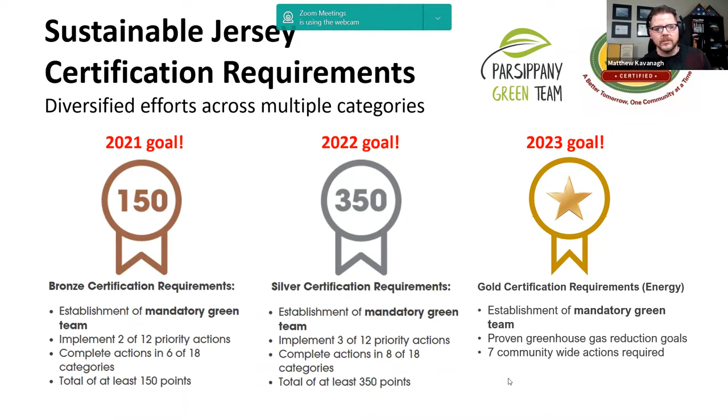So 2021, we're after 150 points or bronze certification. In 2022, we want to get silver, which is 350 points. And then we're also going for gold in 2023, which is the gold certification in energy and is a function of greenhouse gas reductions across the town and the community. But Sustainable Jersey, as I mentioned, is multiple categories of sustainability. These are the large 18 overarching categories.

So you can see animals, arts, energy, food, natural resources, local economies, waste management, community and partnership outreach, diversity and equity, health and wellness. There's a whole bunch of different aspects of sustainability, and targeting just one of these does not create a sustainable community, but targeting actions across a broad spectrum makes your town more sustainable and also improves the quality of life. So for the team membership, we are looking for people to step up and participate in the program. And if one of these areas is of your interest, then we'd like you to speak up and get in communication with us, and then we'll figure out how you can help.

But basically, here is the start with why. Climate change is having a big impact right now and requires everybody's actions today. This is a graph of greenhouse gas emission reduction targets across the world to maintain a 1.5 degrees Celsius global temperature raise. So 50% reductions is required by 2027. So this inflection point right here, this red graph, shows that the longer we wait to reduce our carbon, the more we have to reduce over a rapid time period to stay within the threshold. And that's kind of where renewable energy and some of the ESIP program comes in.

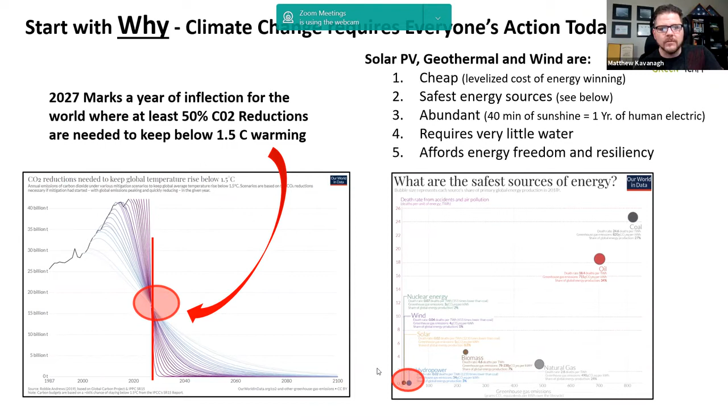So solar PV, geothermal, and wind are cheap, they're safe, they're abundant. In fact, 40 minutes of sunshine is equal to 1 year of human electric consumption on the Earth. And they also require very little water and afford energy freedom and resiliency. So this graph right here from Our World in Data shows that hydropower and solar and wind virtually don't even show up on the map here in terms of safest sources of energy. And these are fatalities for every terawatt hour produced. So very safe, and we'll get into some of the designs that we put together shortly. And then again, Parsippany and its citizens can really be a leader in this space.

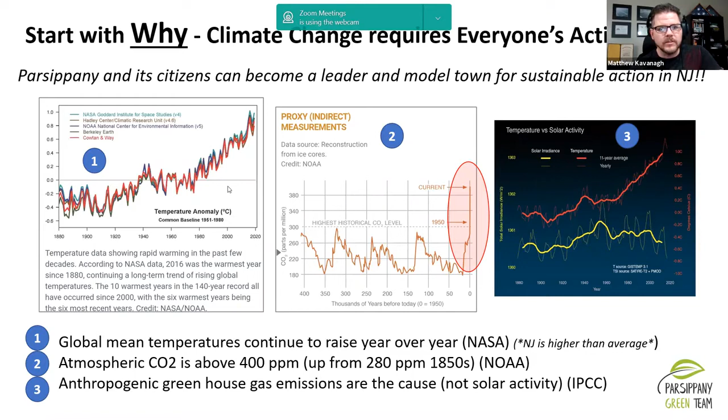So if you're looking at the effects of global climate change, you can see the mean temperature continues to rise year over year, and our state is one of the highest in the United States for the actual temperature impact. Atmospheric CO2 is above 400 parts per million, and this is from 280 parts per million in 1850. And anthropogenic greenhouse gas emissions from burning fossil fuels, from the IPCC, is conclusively where this is coming from. So any number of these graphs, if you look at them, you'll see the increasing rise of temperature, and that's where the ESIP comes in and some of the solutions.

So the action that we're going to talk about is energy efficiency for municipal facilities. And this is one of the gold star actions in Sustainable Jersey in the energy category. It's worth 50 points, and it requires a tracking and reduction of greenhouse gases for municipal facilities across the township. Some of the other gold star actions include electric vehicles, solar, geothermal, across commercial buildings and citizens in the town. But these gold actions are all designed to reduce the carbon footprint of the town over 3 years. So again, this is why it's a 2023 goal, because it takes some time to reduce the carbon footprint.

So how does that tie into an energy savings improvement plan? Well, in a nutshell, an energy savings improvement plan is a financing mechanism which allows retrofitting of facilities with energy conservation measures, or ECMs, with no upfront capital expenditures to the town.

So we passed a resolution in 2020 to open up an RFP for the Energy Savings Improvement Plan. This was signed into law in 2009 through the BPU, and the New Jersey Clean Energy Program regulates it. But basically, the energy conservation measures total up to a net savings of utility expenses for the buildings.

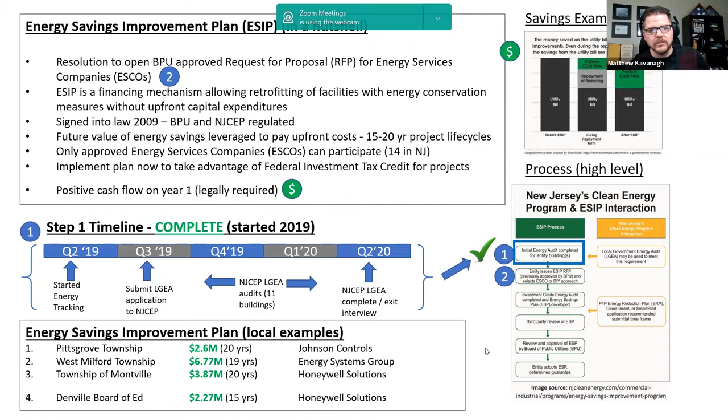So let's get into some financing. So how is this no cost to the township? Basically, there are 2 commonly used options for financing: a lease purchase agreement and a refunding bond. So a refunding bond, you don't need debt, which is available through the ESIP. The refunding bonds are likely to be less costly overall, but they require an ordinance, a public hearing, and approval from the local finance board.

And the other example here is lease purchase agreements. So no ordinance is necessarily required for this, and the agreement can be entered into directly by the local government unit with the ESCO or private financing party. In both financing options, the maturity schedule for energy savings obligations must not exceed the estimated useful life of the individual energy conservation measures.

So they basically here are taking construction costs, soft costs, the average repayment, the expected savings from the energy conservation measures, and then coming up with a 15 to 20 year schedule, including some interest. But then over time, you can see the net cash flows where the benefit flows in part to the municipality.

And then finally, after the term, it all becomes savings for all of the utility expenses. So it's a great way for the town to get started on some actions for these energy conservation measures through a state-approved program and start reducing the carbon footprint of the municipal facilities.

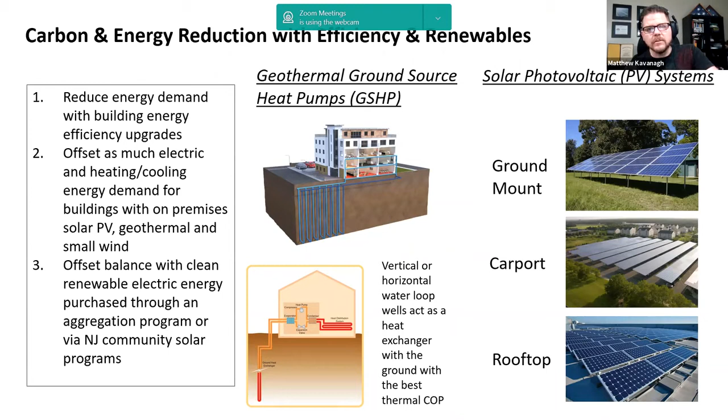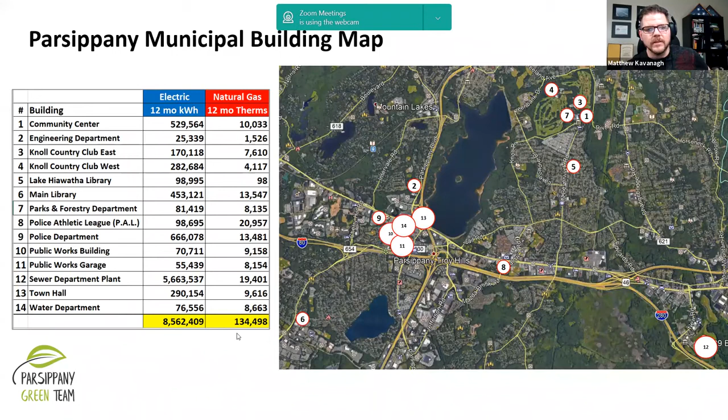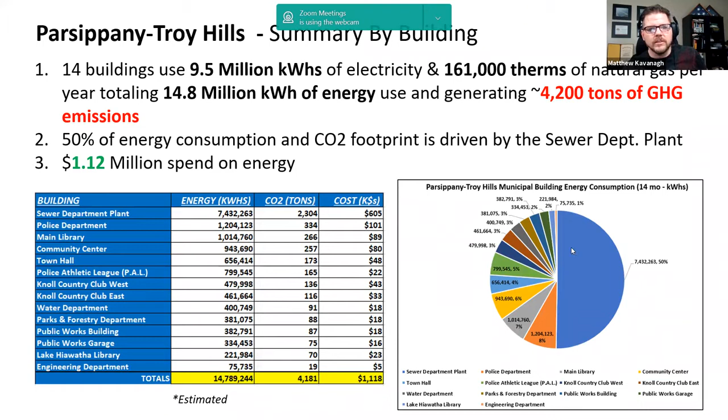So in total, the gross energy consumption was 14.7 million kilowatt hours, equivalent energy. That's natural gas and electric, over 4,000 metric tons of CO2 emissions. And this is just based on the carbon emissions per kilowatt hour and also the carbon emissions by burning 1 therm of natural gas. And total cost is 1.1 million. So huge consumption, huge carbon footprint, and definitely a great opportunity in this program to save some costs.

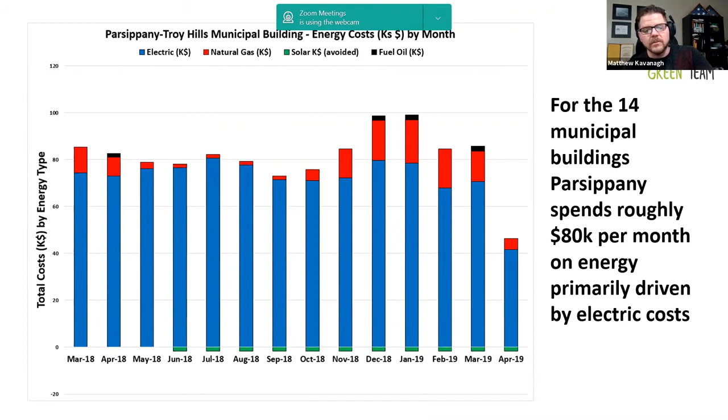So here's just a plot of the energy costs by month. You'll see a spike in the winter time when natural gas is consumed for heating in our area. But it's about $80,000 per month from energy that's needed to run the facilities. And again, this is very small compared to the larger community, but we plotted it here.

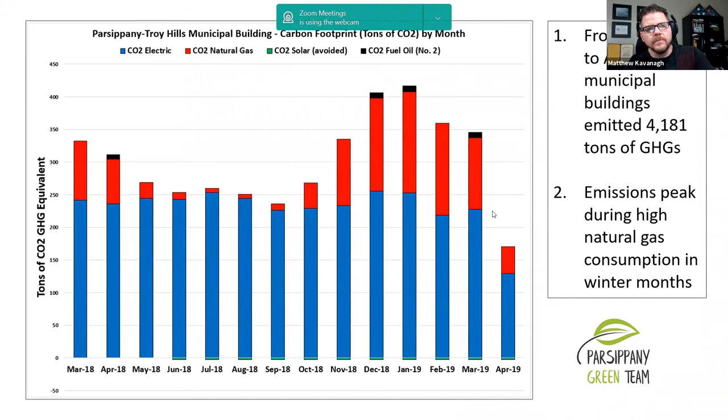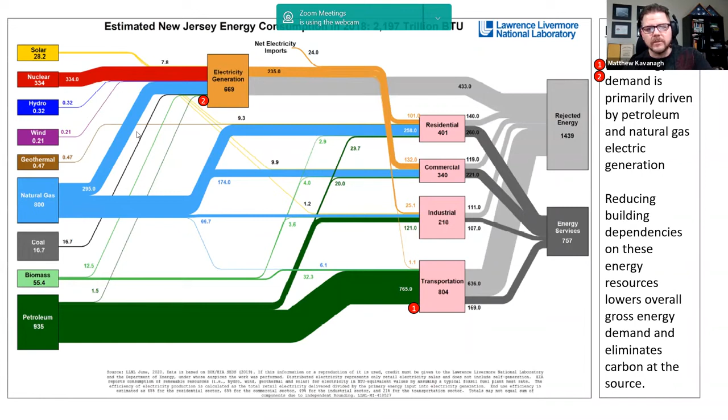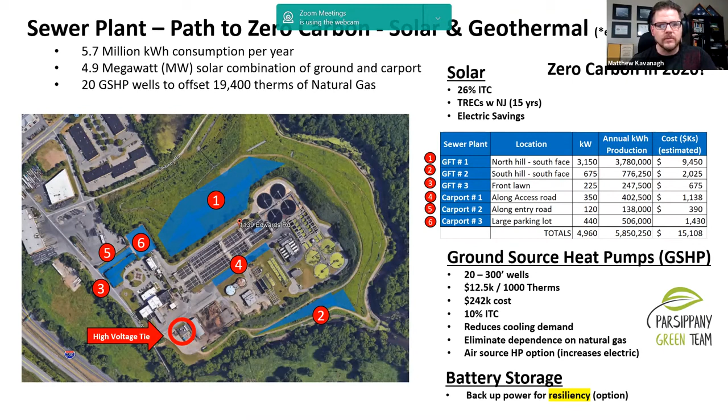So the final design will be some version of this, and we're still in the process of figuring all that out. But potentially as well, an energy storage system could be put in place so that the facility could run for some duration if the grid were to go down, to add some resiliency features to this as well.

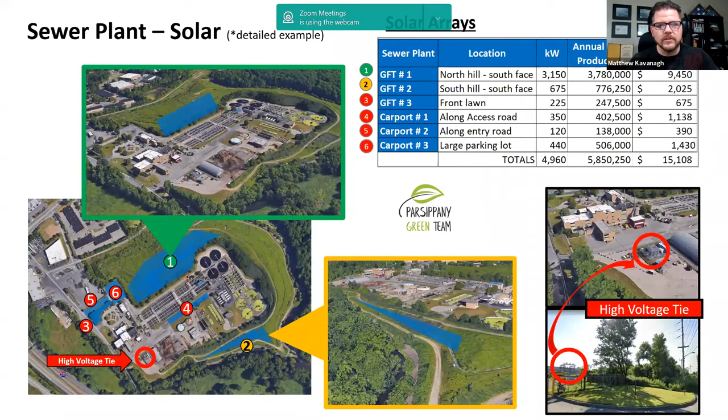Here's some other images, just a little bit more detail. So you can see this is a different angle on the sewer plant, but you can see the slopes a little bit more. And there's a high voltage tie substation right here, which potentially you could interconnect the energy through high voltage lines. The main point to take away here is that there's adequate space on the grounds of the facility to provide heat and electric to offset the carbon footprint of the sewer plant.

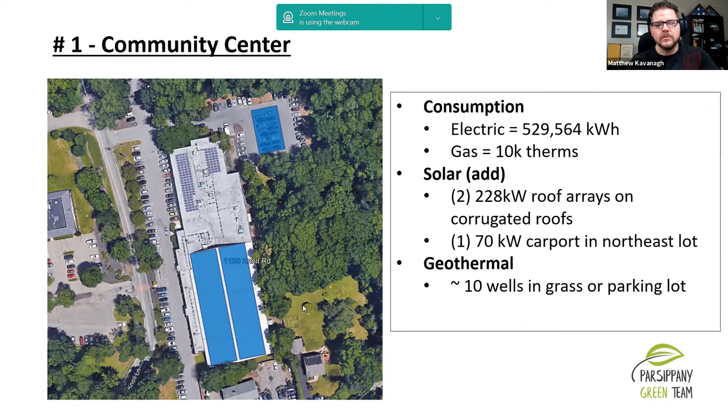And then these are very preliminary, again, very preliminary, but this is the community center. So solar on either side of the roof, the peaked roof here, and a small carport, as well as 10 geothermal wells in the parking lot or the grass area over here could offset this carbon footprint, which is 529,000 kilowatt hours and 10,000 therms.

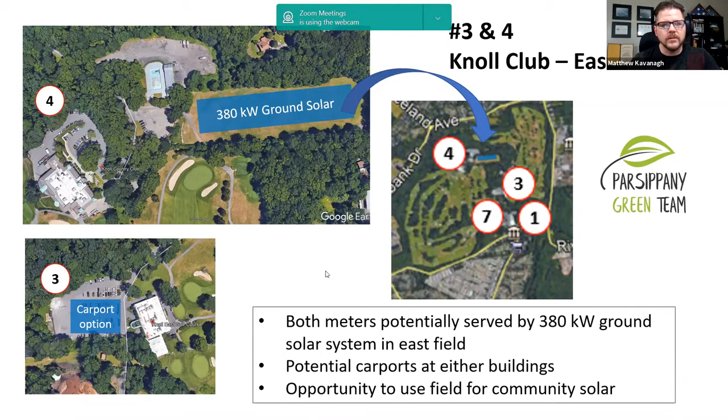For the Knoll Golf Club, east and west, again, preliminary. I didn't necessarily know who owned this plot of land here, but there is something where you can produce energy and then aggregate it with a meter that isn't directly connected to the solar system. And also this could be a community solar project as well, but a ground mount solar system right here, 380 kilowatts, and potentially a carport option could offset the carbon footprint of the Knoll east and west.

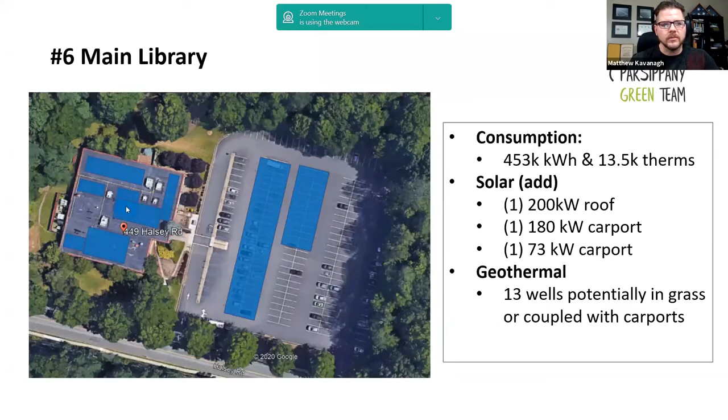And then the police station, 666,000 kilowatt hours and 13,500 therms. Putting solar on the south or southeast or southwest faces of the roof of the police station is one option, as well as some carports in the parking lot here. Looks to get some good sun. And then also geothermal wells. There's plenty of grassy areas where this could potentially be coupled in.

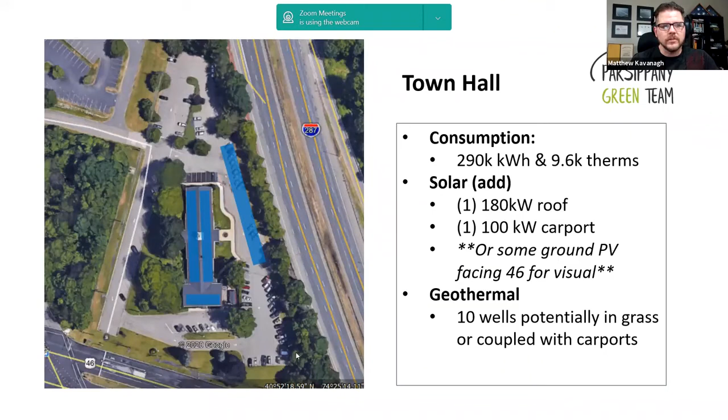And finally, Town Hall, you can see here, 290,000 kilowatt hours and 9,600 therms. And some carports or rooftop solutions could potentially be used, as well as some geothermal wells here. That's the end of the presentation, Gene. Do you have any questions?

I actually do have a couple questions. So we know that Lake Hiawatha, they're building a new building. Would the green team want to get in on the ground floor with that and promote that, maybe we do put solar panels on this new building? I don't know if that's something that would take place when you have the option right now to put your two cents in. It's much less expensive to integrate renewable energy solutions in the initial design of the building than it is to try and retrofit something later on.

The current Lake Hiawatha library consumes oil for heating. So, designing this with ground source heat pumps at the actual construction site with the building design so there's optimal solar or carport structures or something when everything is being built and the parking lot's not paved, whatever that looks like, that's a really ideal place to do it, as well as making the building have passive solar and energy efficiency as much as possible to make sure that the consumption of the building is as low as possible, and then you need less renewable energy.

And then the other thing I wanted to ask was, you had the two different options. You could do the lease option or the bonds. Okay. So the bonds have to be passed by the town council, right? And so is that something that you would find in our taxes? How would that work? I'm less familiar with some of the financing mechanisms. We need to get a little bit more educated about how that works.